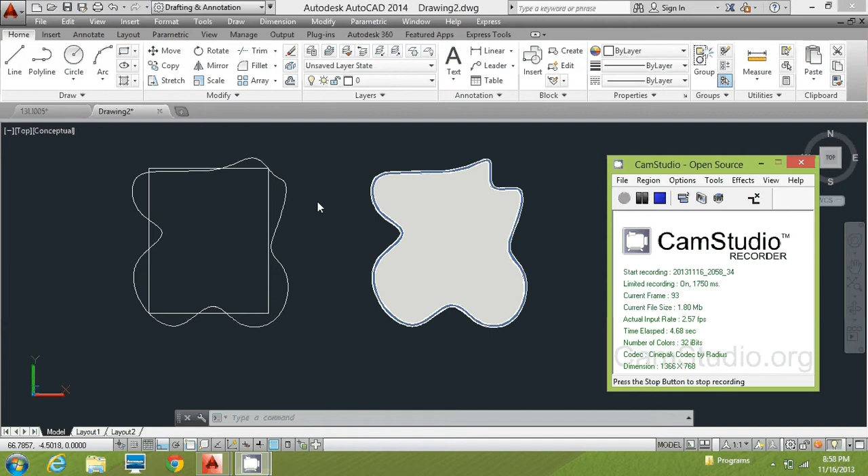Now we're going to do another kind of design for our bathroom mirror. We're going to take that 24 by 30 inch rectangle. I'm going to keep a copy of it. If you don't have this, it's alright, just create a new one, again 24 by 30.

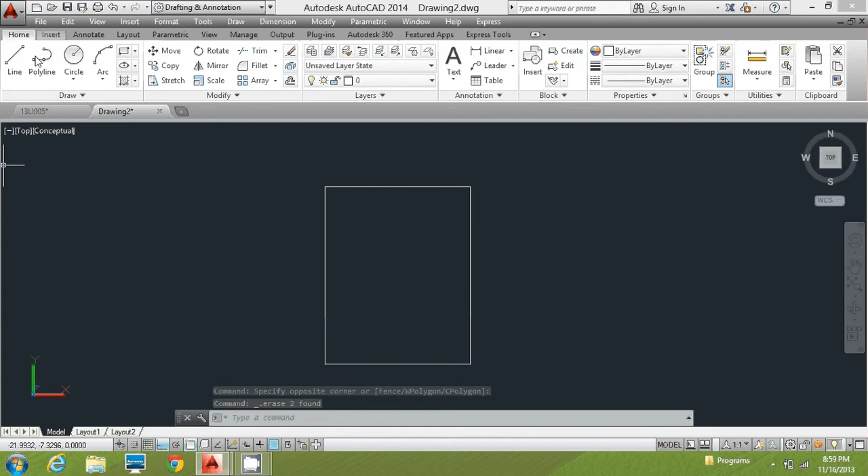Alright, so I'm going to delete those, I don't need those, and I'm going to use that as a reference. I'm going to design the shape I'm looking for, but this time a little differently. I've got spline again, because I like playing with spline. I'm going to create a nice design. Make sure your ortho is off this time, because that will help you create the shape you're looking for. Now I'm going to cut up different little pieces.

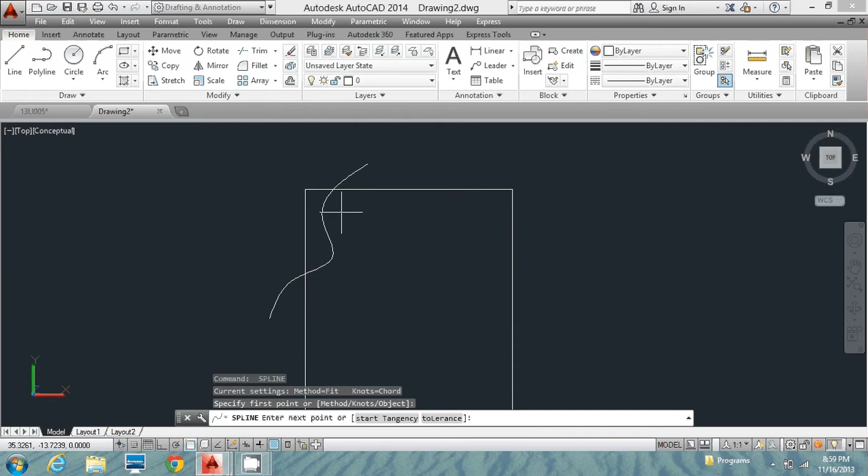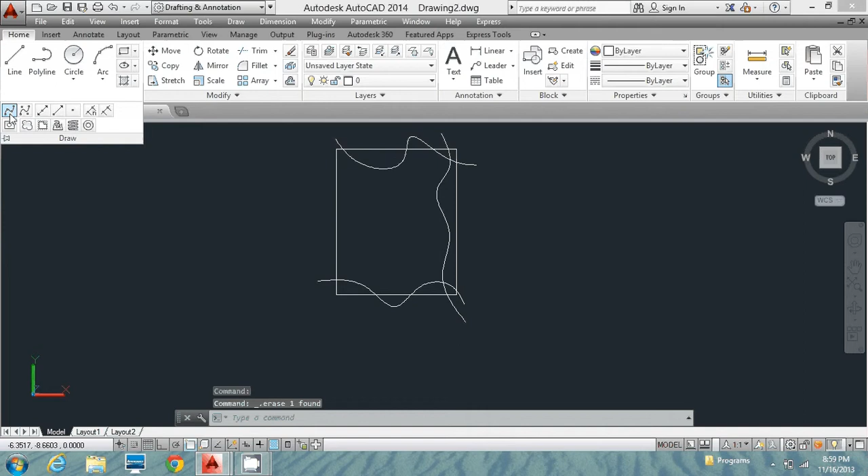Oh, that was a little too far. No sharp corners, that's my design this time. Oh, look, see that design? That's not going to work, but I'm going to go back and fix it up. So I'm going to delete that one and recreate this spline to give it that full length I'm looking for.

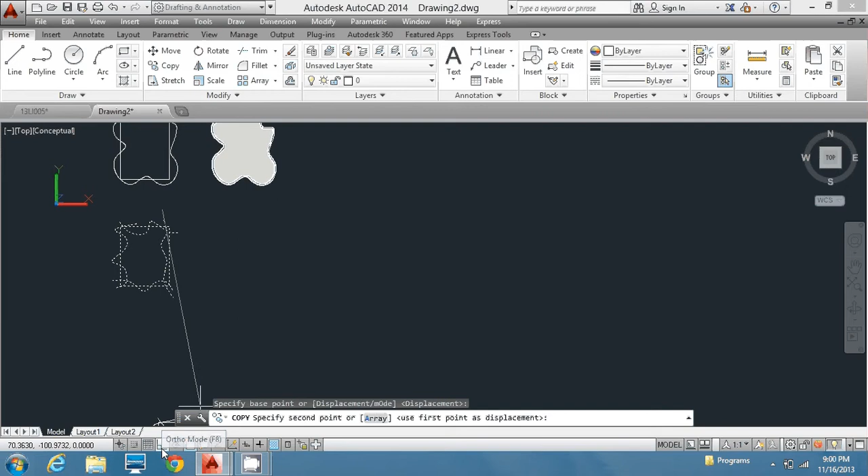Now you'll see why I needed to make these all extended out over the rectangle. I'm going to create a copy of this in case I want to modify it. Again, copy, and I do it at a specified distance with ortho on, I'll do 50.

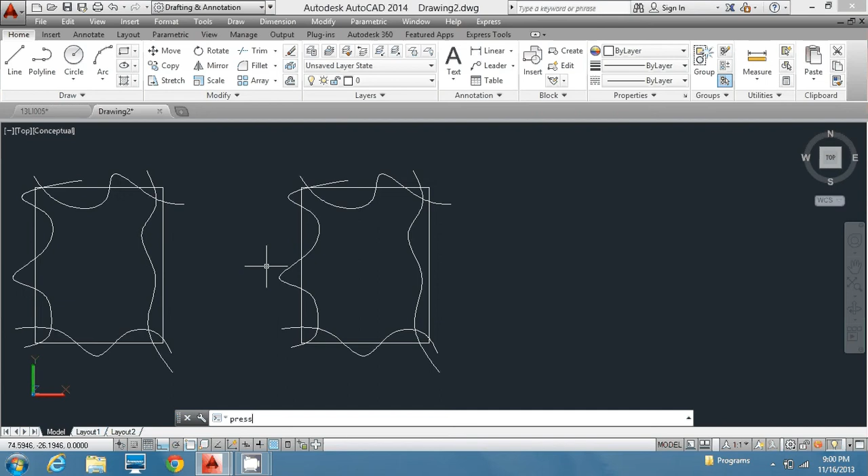And here we go. So what we want to do is extrude the rectangle first, because that's going to create our material that we'll be cutting these future surfaces from. That's one way of doing it. The other easy, fast way would be a press pull. So I go press, pull, enter, and select the inside part. But the problem is the rectangle isn't allowing me to do this. So I'm going to remove that rectangle, or I can go to isolate and hide it since I might need it later. So I'm going to do press pull again.

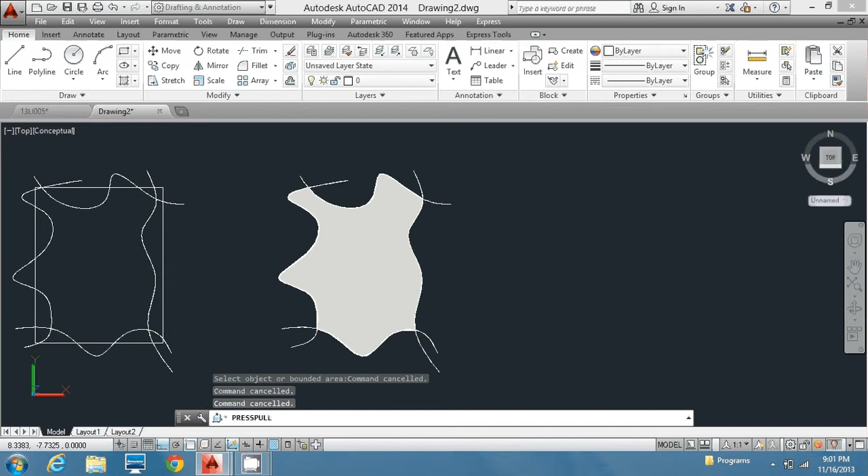Let's select that inside. I'm going to give it a thickness, 0.125, an eighth of an inch. And I have this mirror. This time the mirror will have no frame, but it does have a thickness, you can see. So it is a material, which is nice. The other option would be, let's go back a little bit.

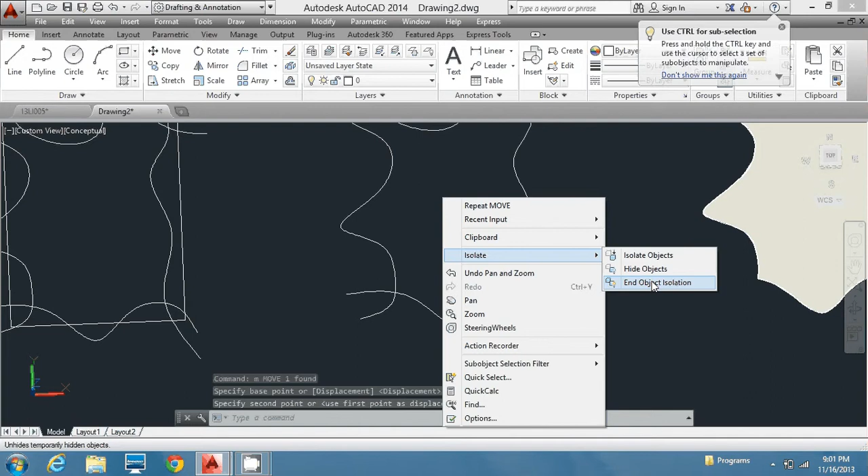I'm going to move this over 50. Since I have everything still back here, I right click, unisolate my rectangle. The other option would be extruding out each side. So I'm going to select all these sides, let's say about, it doesn't matter what height, I'm going to put it at 2 inches. And I'm going to extrude the rectangle. The thickness will be 0.125 since we're using that same thickness.

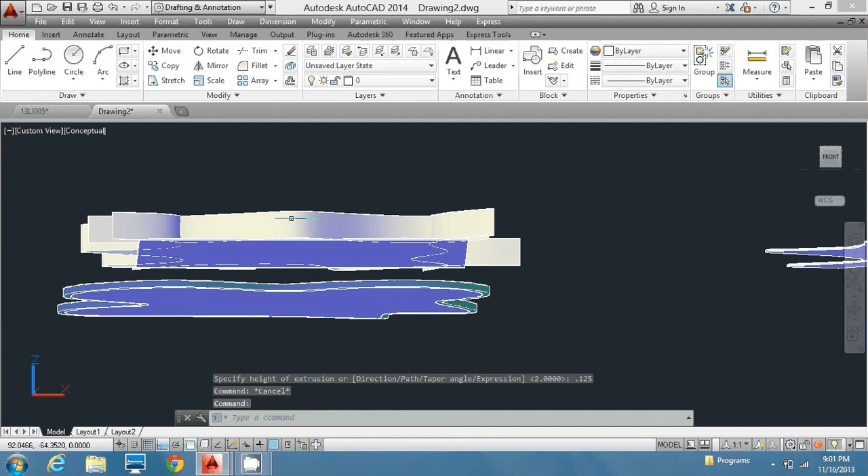So now you can see that the surfaces out here are a lot higher. Now this actually looks like a really cool design, so I'm going to keep a copy of this as is too. Copy it down, 50. There we go. And for this option, I'm going to subtract it to get the cutout I'm looking for, to get this shape. Just in case you can't get it this way, there's always another way to do this.

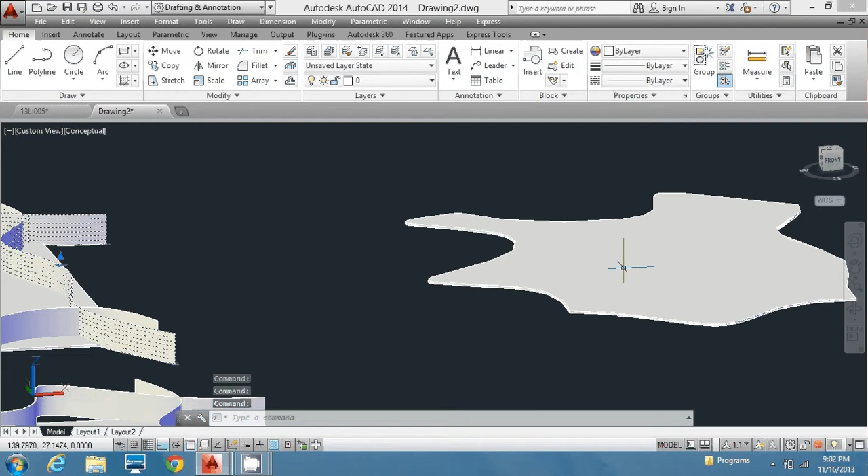So I'm going to move this down, using that blue arrow here. Yeah, it's asking me if I want to move surfaces since they're a little more complicated. I'm fine with that. I got this part, I got these parts crossing over all through the whole piece, each part. And we use the slice command.

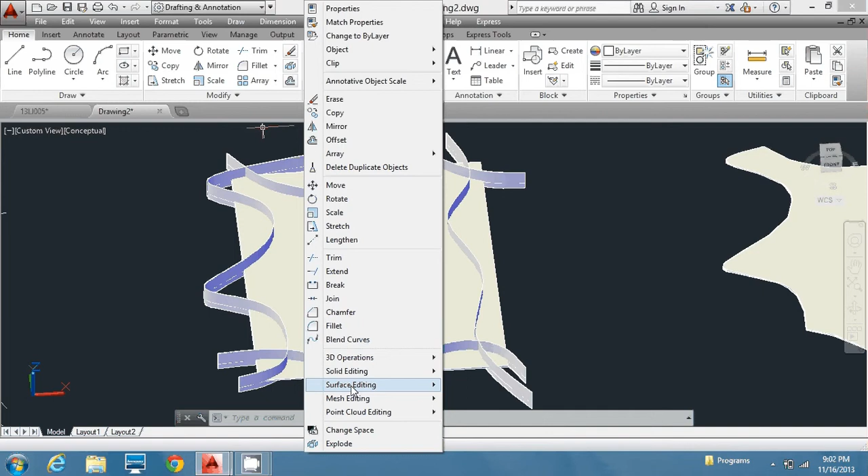So I'm going to go to Modify, 3D operations, Slice. You select the object you want to slice, enter, then select S for surface. Select this one first, enter, and that should cut it. So if I delete that, yep, see it cut that piece.

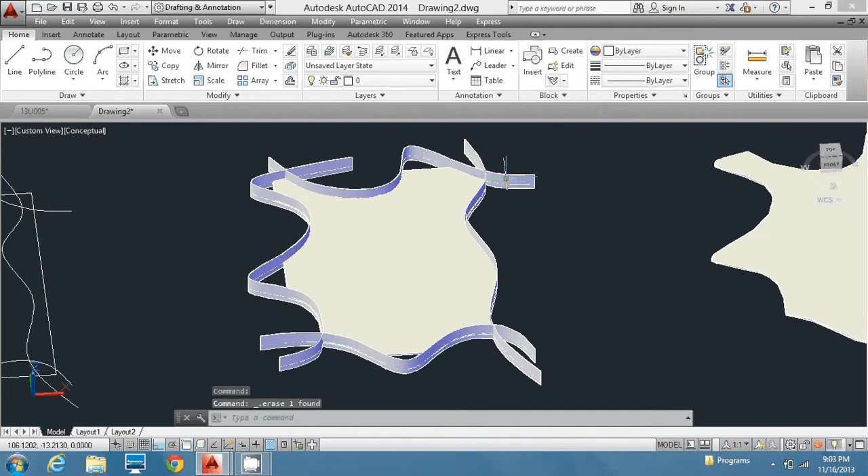Now I repeat that same process the other times, because it can only select one surface at a time. Slice, object, enter, S for surface, select that, enter. S for surface, enter. Select, S for surface, enter. Now I should be able to delete these outer edges without a problem. I can also remove these parts.

To create my object, the rectangle is still there. Remember, it wasn't overextended, so I'm missing these pieces, but that's alright, because this is a different design and I want to try something new. There we go, different shape, not as smooth as the other.

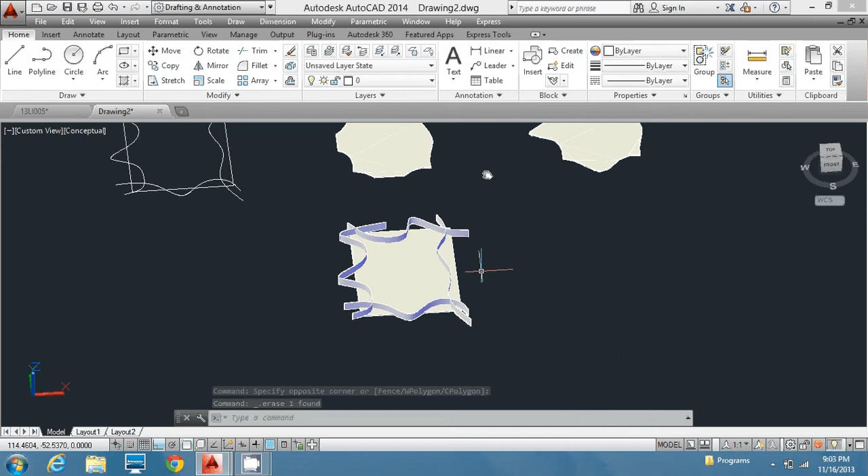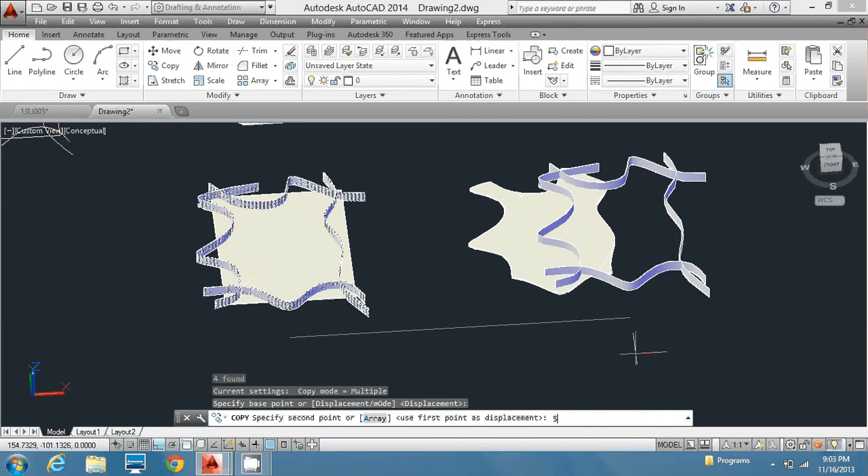Now this one, I want to play around with these. I like the frame a lot. So I have to figure out how to copy these, which I'm going to go down 50. That's the mirror. So I got the mirror, and I'm going to copy the surfaces over 50, and that's going to be the frame. But the frame needs a thickness.

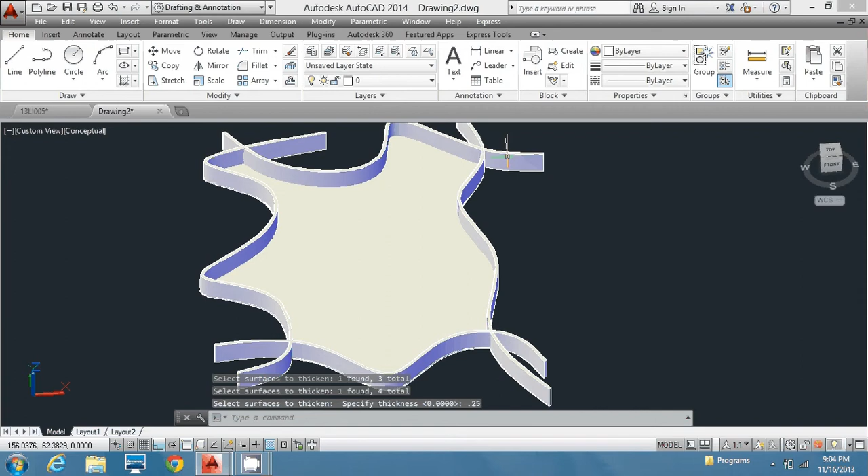So what we can do is go to Modify, 3D Operations, and right next to Slice, there's Thicken. Thicken allows you to give a surface a thickness. So we're going to select the surface, create that one, and possibly try to select all of them. And then we're going to create a thickness of about a quarter of an inch. And as you can see, it all got thickened.

Now it may have overlapped toward the mirror, but that's alright, I don't mind. But overall, it looks like a pretty cool design. So if I change this material to wood, or any other material, and the mirror into something like chrome, it will come out really nice. So that ends our design of the mirror.

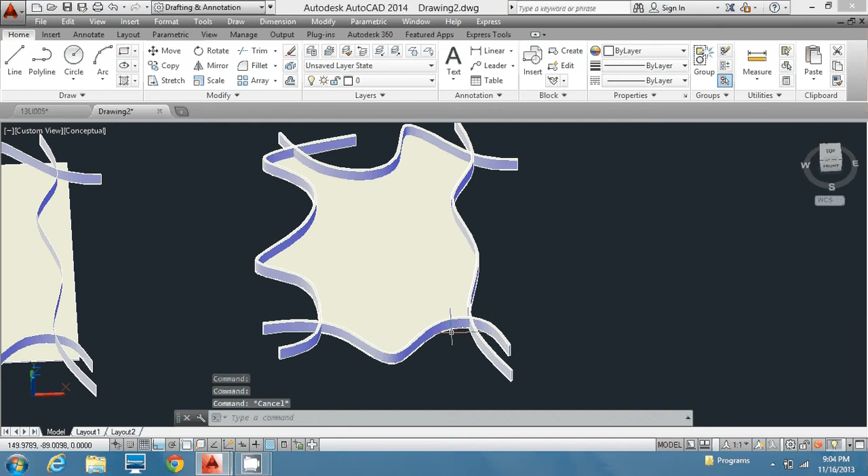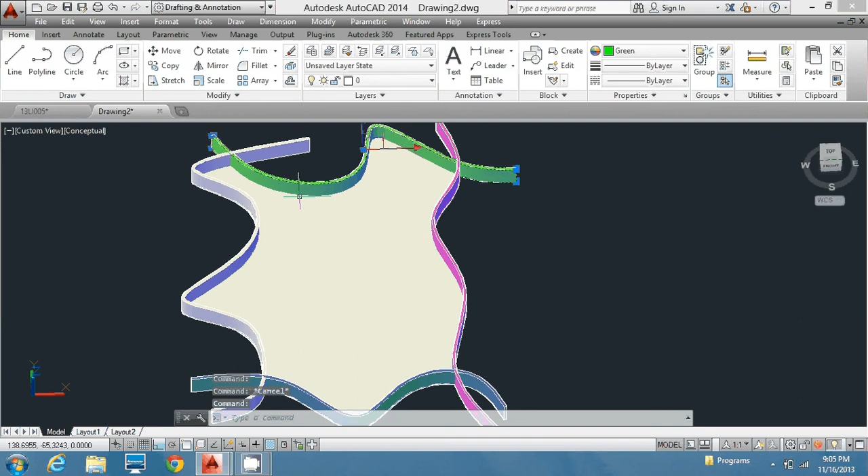Actually, let's just try different coloring. Select this frame, go to, oh, it's not going to let me, since I do it one by one, I'm guessing. Blue, change this to purple, green, and red. I might as well just change the middle into something different, a little darkish gray. Oh, selected 2 items at once. There we go. So this is my mirror with a cool designed frame, which can be done in the right factory.